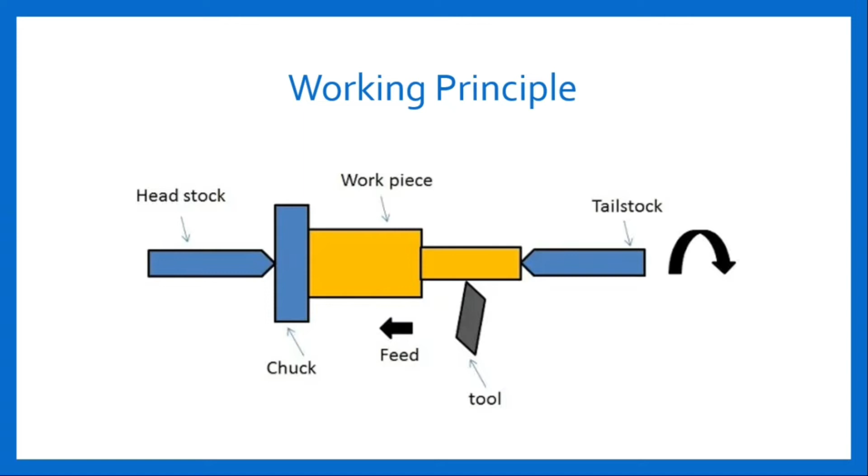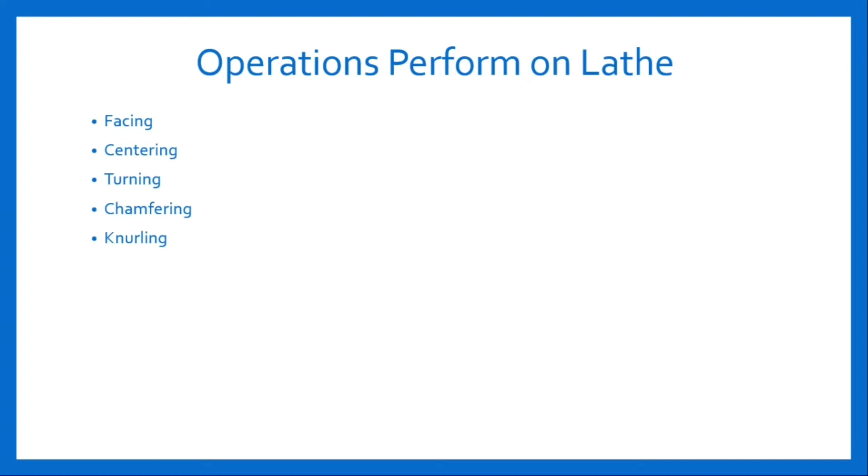Lathe machine consists of the following operations: facing, centering, turning, chamfering, knurling, thread cutting, drilling, boring, reaming, tapping, and parting off.

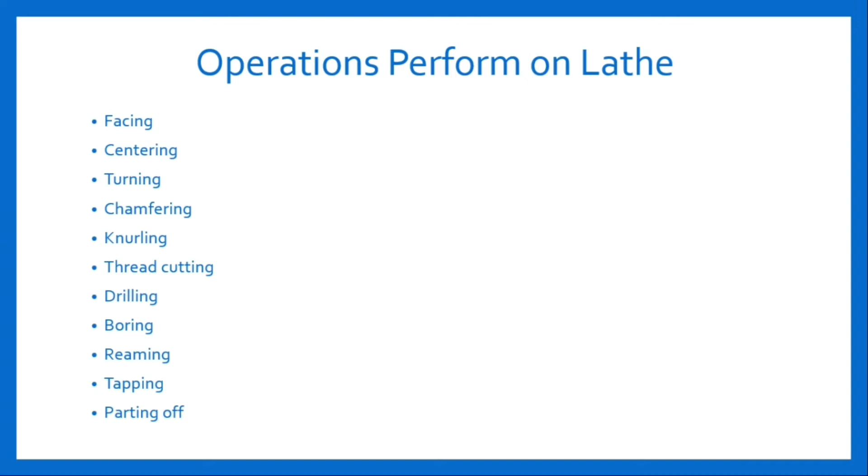Before conducting any operation on the lathe machine, we have to load the job and center it on the headstock spindle. The headstock spindle holds the job and it rotates with the same speed as the spindle. The carriage holds the tool on the tool post, and also moves the tool post in longitudinal and cross-side directions to give the desired feed on the job. These two motions help remove chips of metal and give the proper shape to the job.

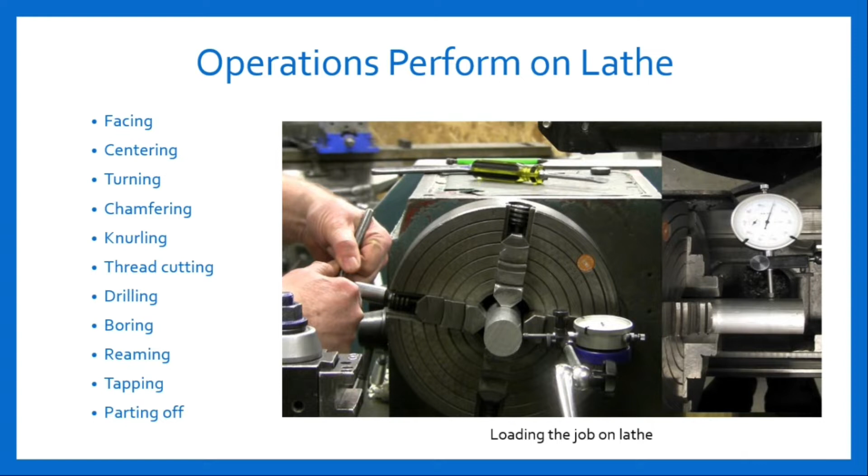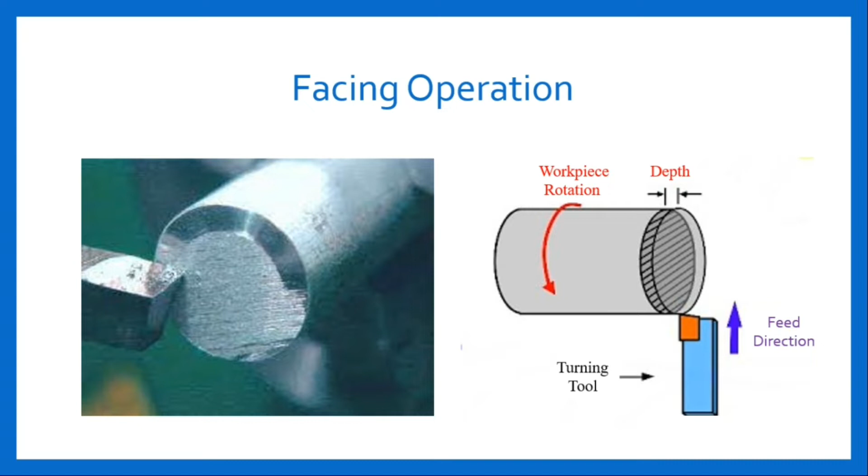Facing operation. It is the first operation done on the workpiece. It is a machining operation done to produce a flat surface at the ends of the workpiece. This operation is performed by feeding the tool perpendicular to the axis of rotation of the chuck. The work revolves in the center, the facing tool is mounted on the tool post, and cross feed is given to the tool with the help of the cross slide.

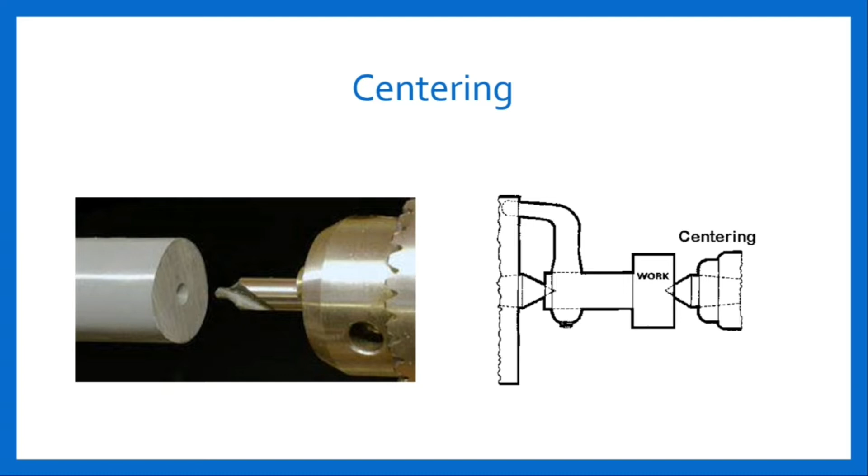Centering operation. This is the operation of producing a conical hole in the workpiece so that it can be held between the chuck and dead center. For centering operation, a combination drill and countersink is used. The drilling and countersink hole has the same angle as the lathe center so that the lathe center fits well into the hole. The standard included angle is 60 degrees for general class work and 75 degrees for heavy duty work.

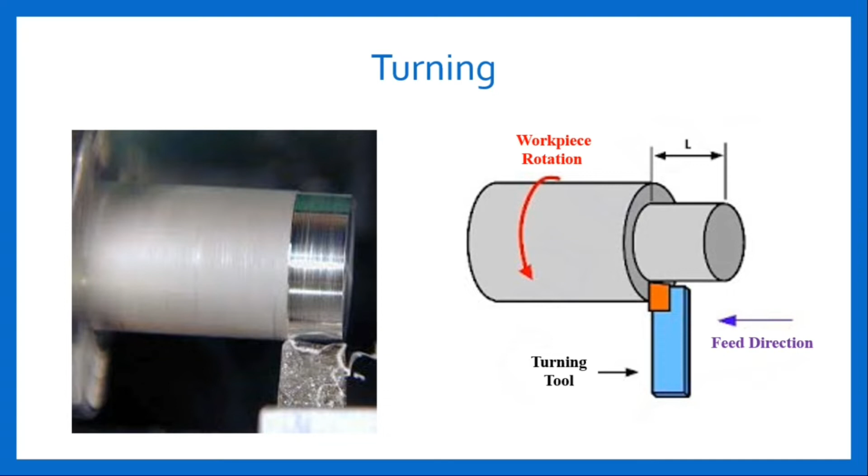Turning operation. In turning operation, excess material is removed from the surface of the workpiece to produce a cylindrical surface of desired shape and size. During the turning operation, feed is moved along the axis of rotation of the chuck. It reduces the diameter of the cylindrical workpiece.

Turning is of the following types: rough turning and finish turning. Rough turning is done by taking a heavy depth of cut and giving a high feed rate to reduce machining time. During rough turning, the work is revolved at lower speed and cutting speed is low. Depth of cut varies between 2 to 5 mm and feed rate is 0.3 to 1.5 mm per revolution of the work, producing a rough surface finish.

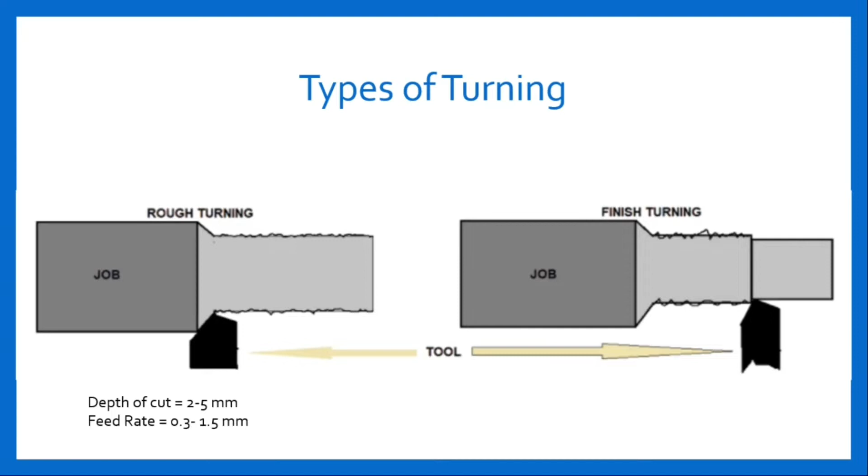Finish turning requires high cutting speed, small feed rate, and small depth of cut. It gives a smooth surface finish. The depth of cut ranges between 0.5 to 1 mm and feed rate is 0.1 to 0.3 mm per revolution of the work, producing a finished surface.

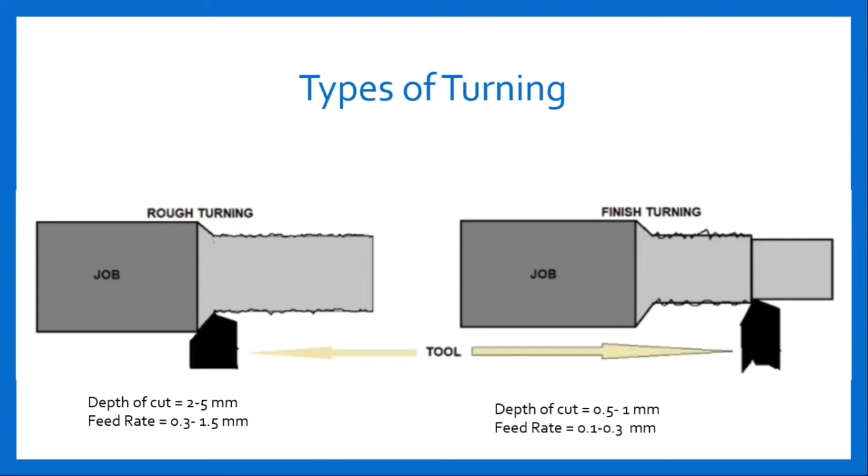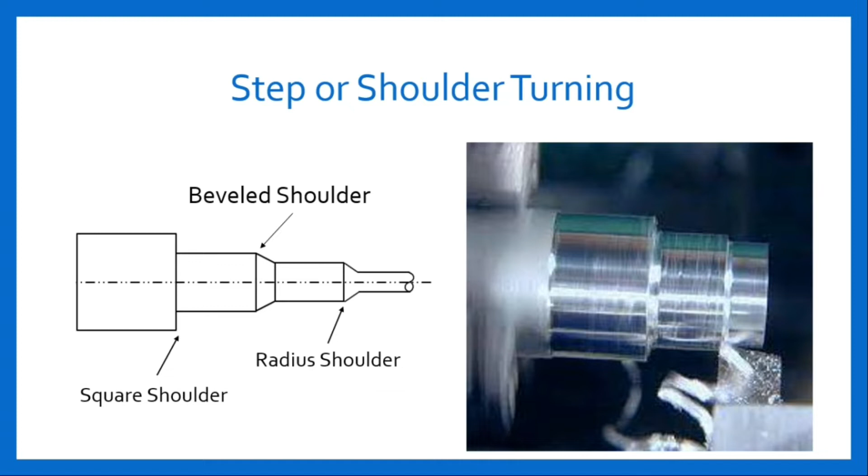Step or shoulder turning. When a workpiece having different diameters is turned, the surface forming the step from one diameter to the other is called a shoulder, and machining this part of the workpiece is called shoulder turning. Different types of shoulders produced are square shoulder, beveled shoulder, and radius shoulder.

Taper turning. Taper turning is a turning process in which the cutting tool moves at an angle to the axis of the workpiece so that the workpiece receives a taper shape. In a tapered piece, the diameter of the workpiece varies uniformly from one end to another. The workpiece can be tapered from inside or outside.

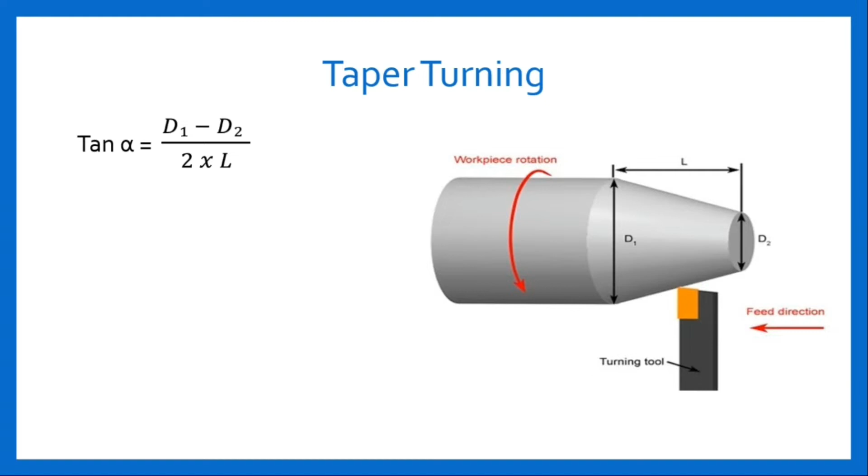Taper may be specified by tan alpha equal to (d1 minus d2) divided by 2L, where alpha equals tan inverse of (d1 minus d2) divided by 2L. Here, d1 is the larger diameter of the taper in millimeters, d2 is the smaller diameter of the taper in millimeters, L is the length of the taper in millimeters, and alpha is the half taper angle.

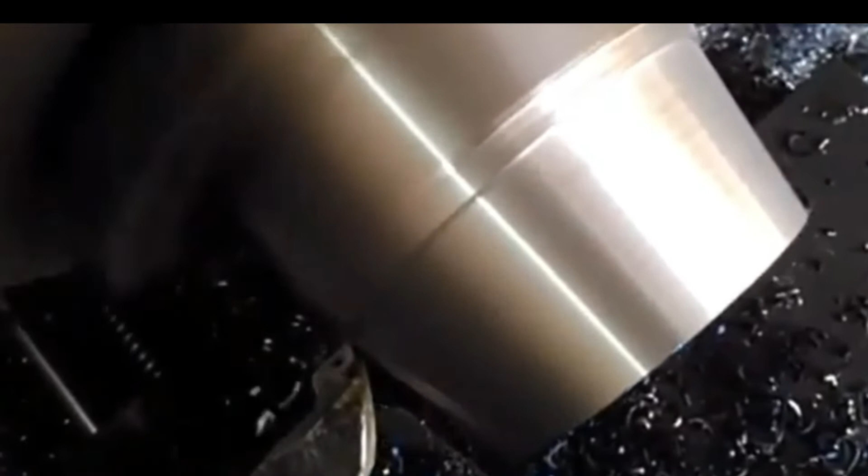There are various methods of taper turning. The first method is taper turning by the form tool method. A form tool having a broad nose is used for short external taper turning. The tool is ground to half the taper angle and fed to the work perpendicular to the lathe axis to obtain the desired tapered shape. It is used for small taper lengths, for example chamfers, heads of screws, etc. The length of taper is limited to the width of the tool.

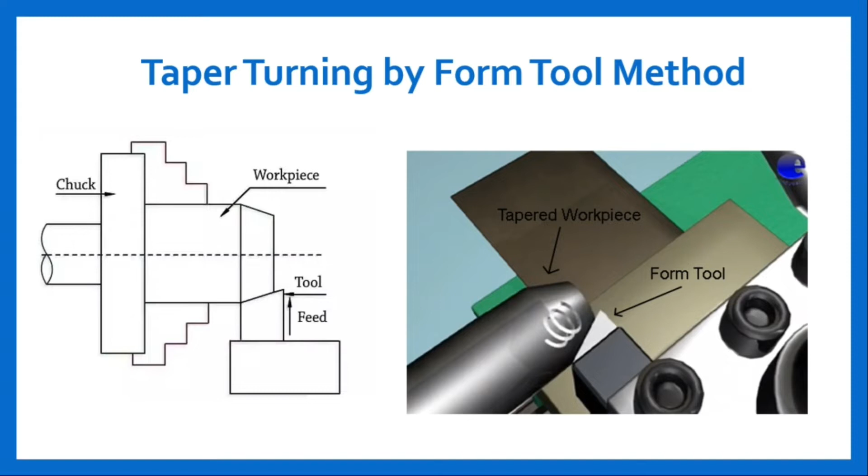The second method of taper turning is taper turning by the swiveling compound rest method. In this method, the tool is fed at an angle to the axis of rotation of the workpiece. The tool is mounted on the compound rest, and the cutting edge of the tool is accurately set at the center line of the workpiece. The compound rest has a circular base which is graduated in degrees. It is swiveled to the half taper angle and clamped.

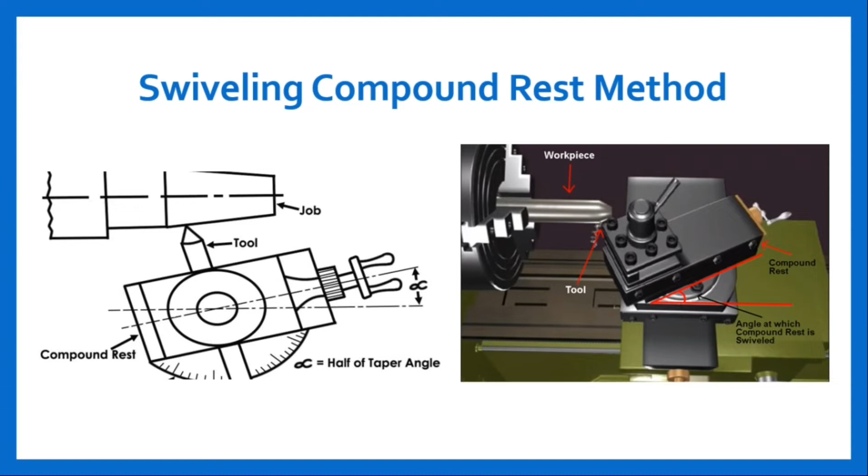After setting the compound rest at the half taper angle, rotation of the hand wheel causes the tool to feed in an angular direction, generating the corresponding taper on the workpiece.

The third taper turning method is taper turning by set over tailstock method. In this method, the axis of rotation of workpiece is made inclined at an angle equal to half taper angle with lathe axis by setting the tailstock center. Tool is fed parallel to axis of lathe. Setting over tailstock is done by sliding the body of tailstock towards or away from the operator by means of a set screw. The amount of set over is limited, hence this method is used for turning small taper on long slender jobs. It requires use of a ball type dead center.

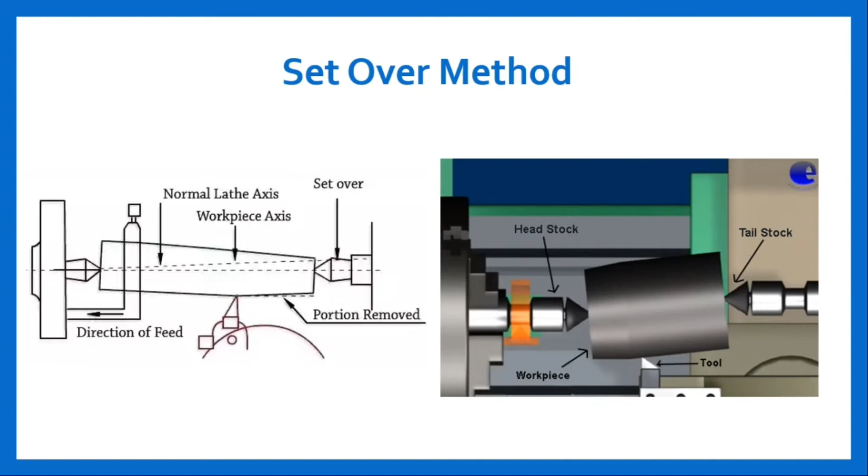The next method of taper turning is taper turning by taper turning attachment. In this method, work revolves between the center or with the chuck and tool is guided in a straight path set at an angle to axis of lathe by using taper turning attachment.

The taper turning attachment is fitted on the rear end of the lathe bed. It consists of a frame, guide bars and guide blocks. The frame is attached at the rear end of the lathe bed and supports the guide bar pivoted at the center. The guide bar has graduations in degrees and can be swiveled either side of the zero mark and set to the desired half taper angle with the lathe axis.

When the taper turning attachment is used, the cross slide is first made free from the lead screw by removing the binder screw. The rear end of the cross slide is then tightened with the guide blocks by means of a bolt. The tool moves with the guide block, which slides on the guide bar set at an angle to the lathe axis. When longitudinal feed is engaged, the tool travels in an angular direction to generate the corresponding taper on the workpiece.

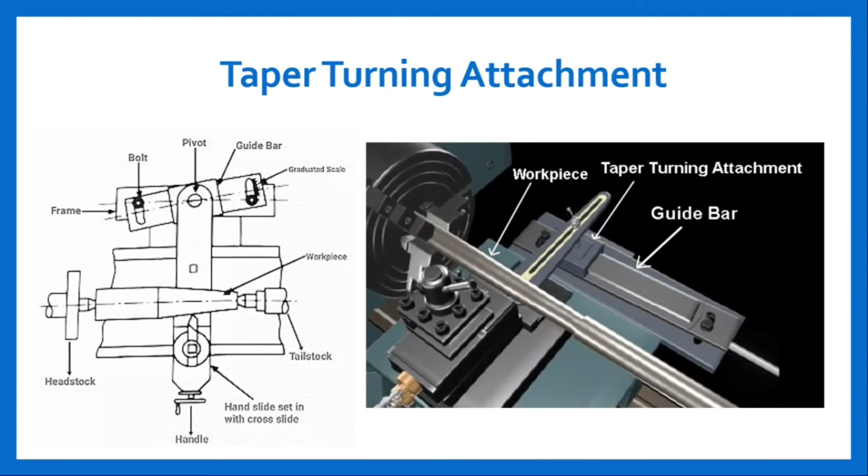Chamfering operation. Chamfering is the operation of producing a bevel-shaped finish at the end of the workpiece. Chamfering is done for removing burrs and for protecting the ends from getting damaged. Chamfering is essential after thread cutting operation. It may be performed after turning, knurling, boring, drilling, etc.

Knurling operation. Knurling is the operation of producing a diamond-shaped pattern on the surface of the workpiece. The purpose of knurling is to provide an effective gripping surface on a workpiece to prevent it from slipping when operated by hand. It is provided on handles of machines and gauges.

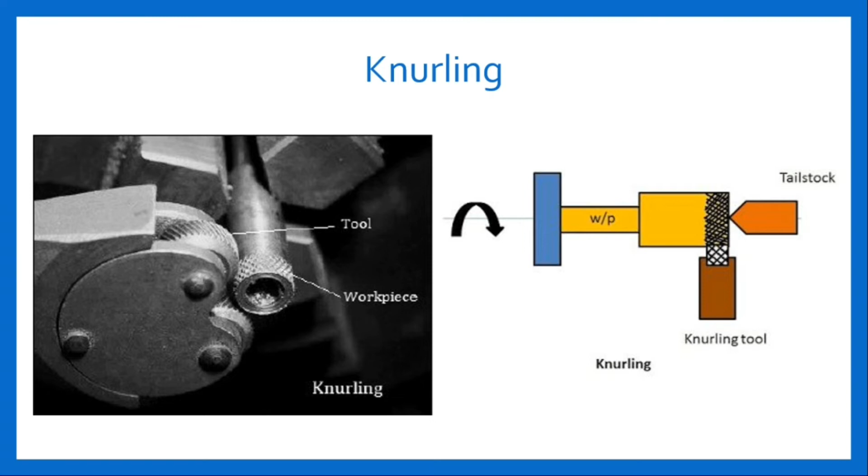It is done by a knurling tool which consists of hardened steel rollers in a holder. They have teeth cut in a definite pattern on their surface. This tool is held rigidly on the tool post and the rollers are pressed against the revolving workpiece to get an impression in a regular pattern.

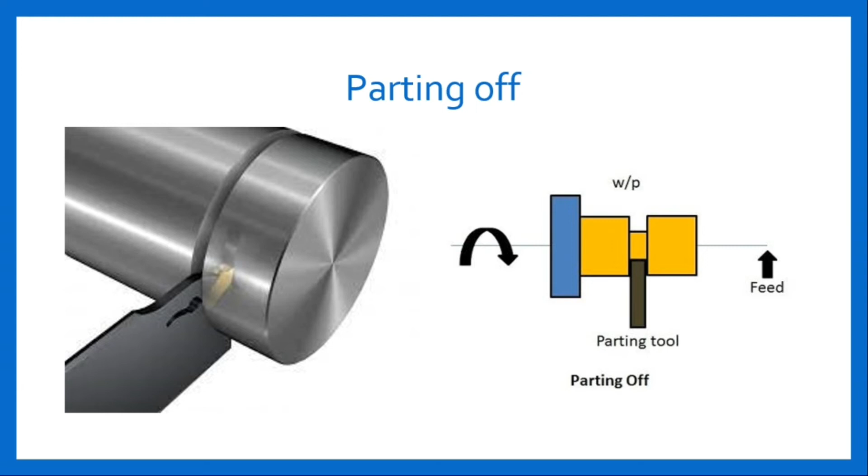Parting off. It is the operation of cutting a workpiece after it has been machined to the desired shape and size. In this operation, the workpiece is rotated at half the speed of turning, and a narrow parting off tool is fed perpendicular to the lathe axis by rotating the cross-slide hand wheel. The carriage is locked at a particular position before the start of the operation.

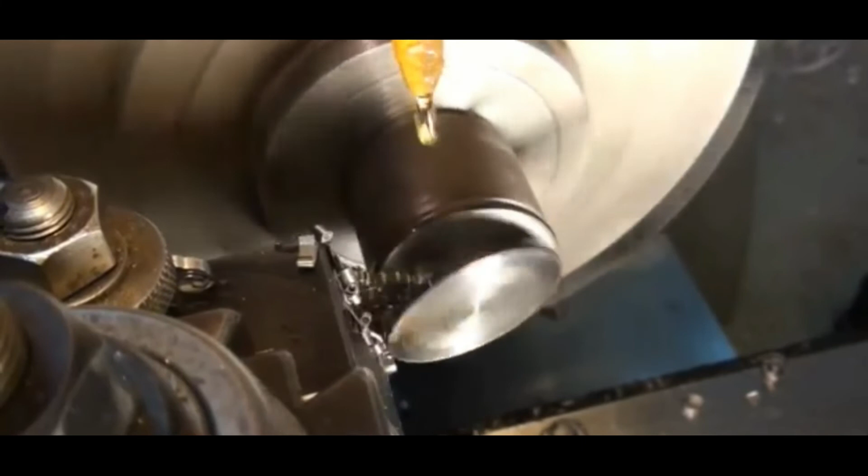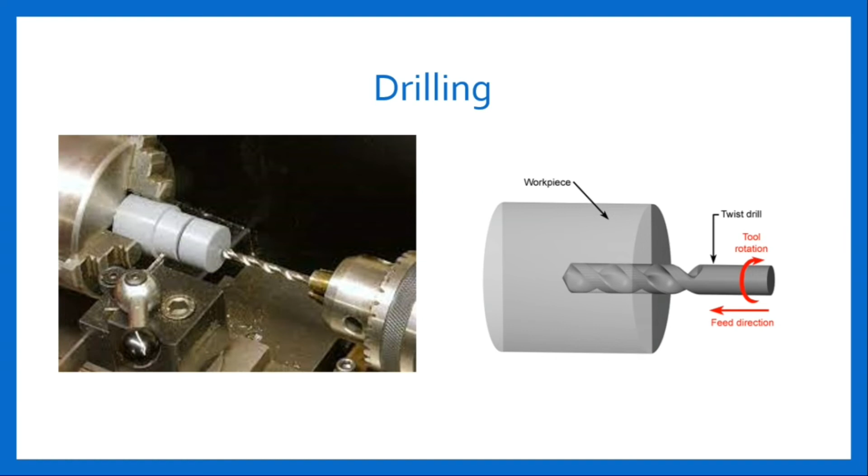Drilling operation. It is the operation of producing a cylindrical hole by removing metal by the rotating edge of the cutting tool called a drill. The workpiece is held in the chuck and the drill tool is fitted in the tailstock barrel. The speed and feed for drilling operation is 25% lower than the normal speed and feed used on a drilling machine.

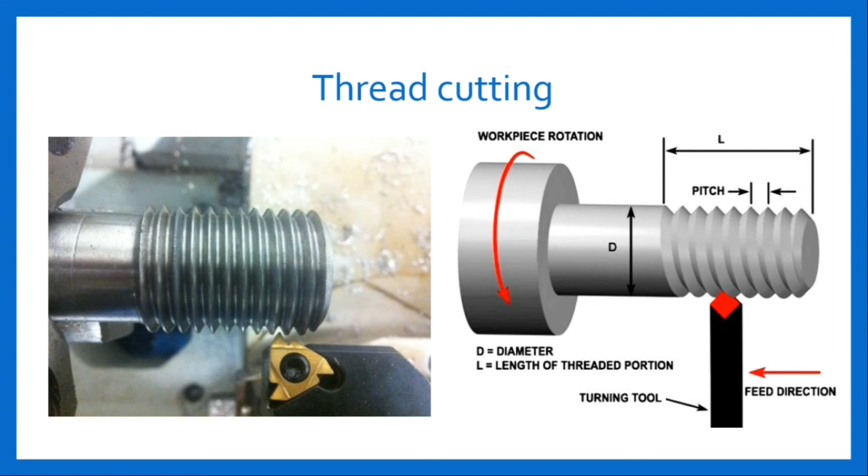The workpiece rotates about the lathe axis slowly with the help of the back gear. The lead screw shaft is connected to the lead screw and spindle through change gears, and the movement of the tool with the carriage is obtained by the half nut mechanism.